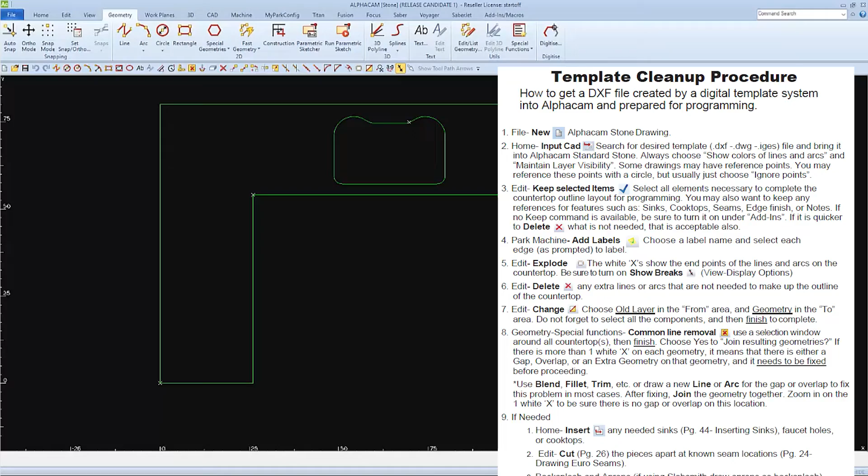You may or may not need to follow all the steps in the procedure. It depends on the method and completion of the digital template. We'll start off with step 1 of our procedure, which is to go to File tab and choose New. Then we can go to the Home tab and choose Input CAD.

When it opens, we can select what we would like it to bring in, text, if we want it joined, and so on. I'm just going to leave all of the selections checked. Then I can click OK and browse to the template that I want to clean up. Then you can either double click on it or highlight it and choose Open. If you get the message that points are found on a layer, always choose Ignore Points. You may have to do this multiple times.

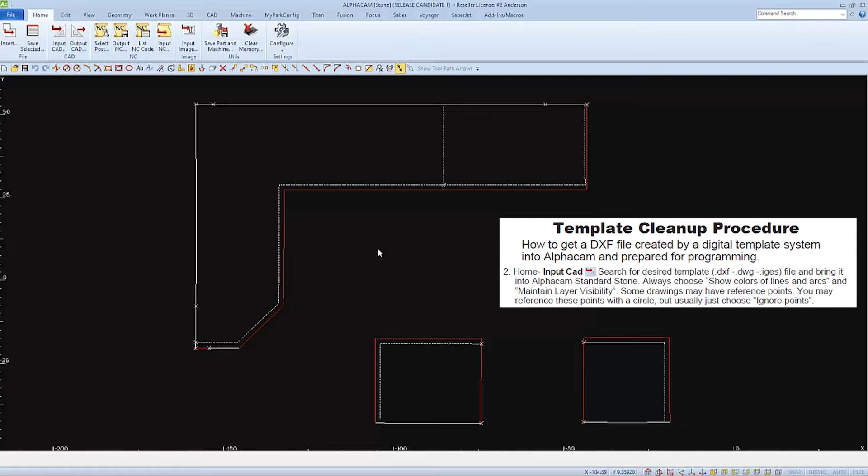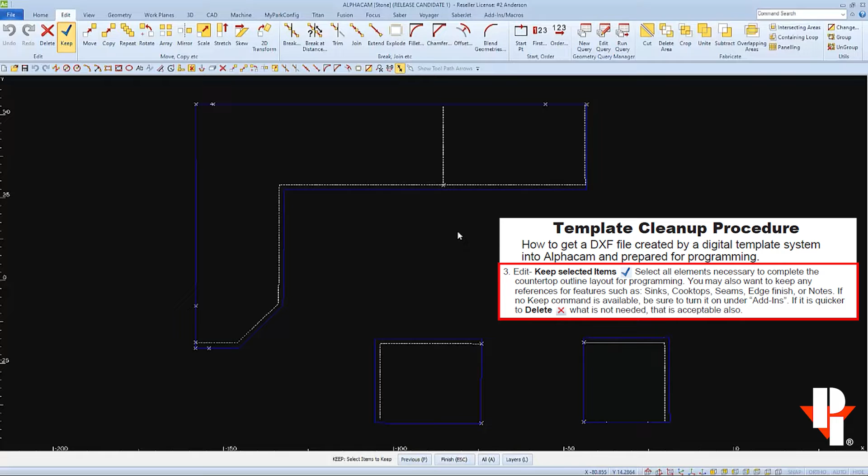Step number 3 is to keep the entire countertop perimeters and/or delete everything else except for the sink center line. The Keep command should be under the Edit tab. If not, you can turn it on under Add-ins. When you click on Keep, it says Select Objects that you would like to keep. Select the entire countertop's perimeters and also the center line of the sink. And then when you finish, it will ask if you want to keep the geometries and delete the rest, which you can click OK to complete.

Step 4 is to add labels if you wish. Labels are nice to identify edges if they need additional machining. You can find Add Labels under any of the Park Industries machine tabs. I'll start by using the Wall Scribe button. When I choose it, I'll be asked to select an edge to label, and then to click on a side that I want the label to be placed.

Notice how this side is broken up into 2 separate lines. If I click closer to the other end of the line, I can put another label there as well, whereas this edge is made up of 1 line, and the label will go right in the middle of it. These walls are the same, 1 line. And when I'm done with the walls, I'll right-click to finish so I can select another button from the Add Labels window. The only other edge that I have to label is the profiled edge.

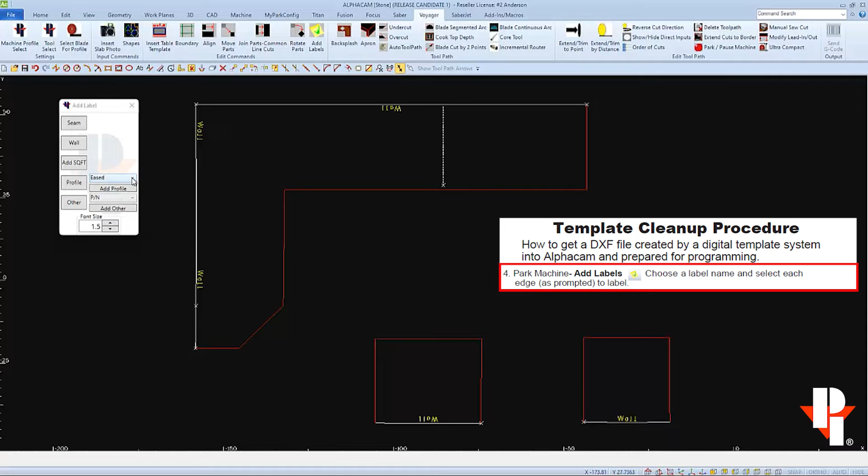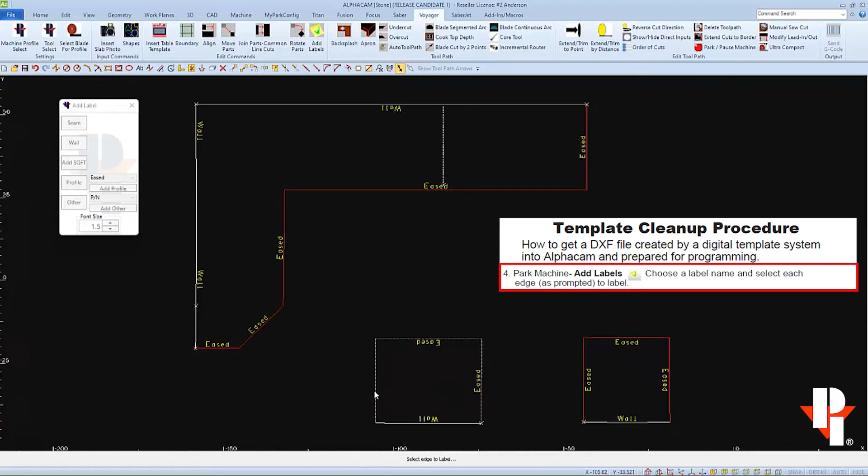I can choose the Add Profile button and type in a new name if I need, or if the name has already been added, I can select it from the drop-down window. So when I pick on the Profile button, that is the name that will be applied, which I'll do just like the Wall Scribes. Select an edge and then select the side. And when I'm finished, I'll right-click and then I can close out of the Add Labels window.

Step number 5 is to explode. I'll choose Explode and select everything. Text or labels will not be affected. Notice how this wall broke into line segments. This is why we could apply more than one label to an edge. Labels will center themselves in the middle of each line segment. The main reason for exploding is to see if there's any additional line segments that we might need to delete, which is step number 6.

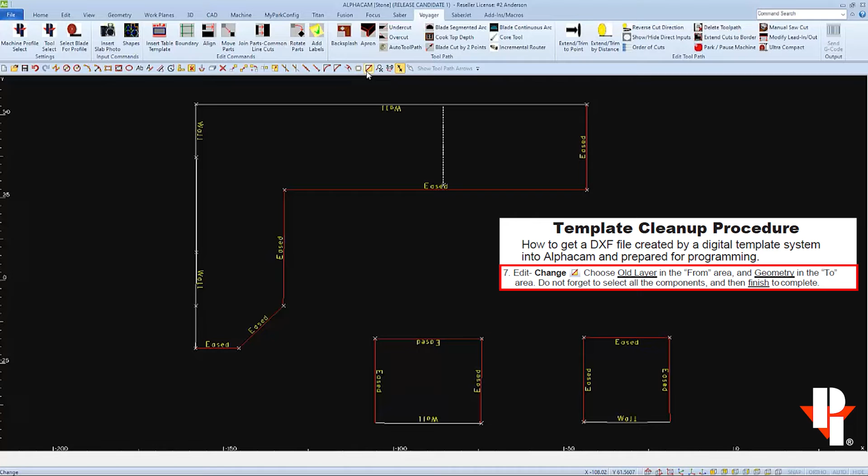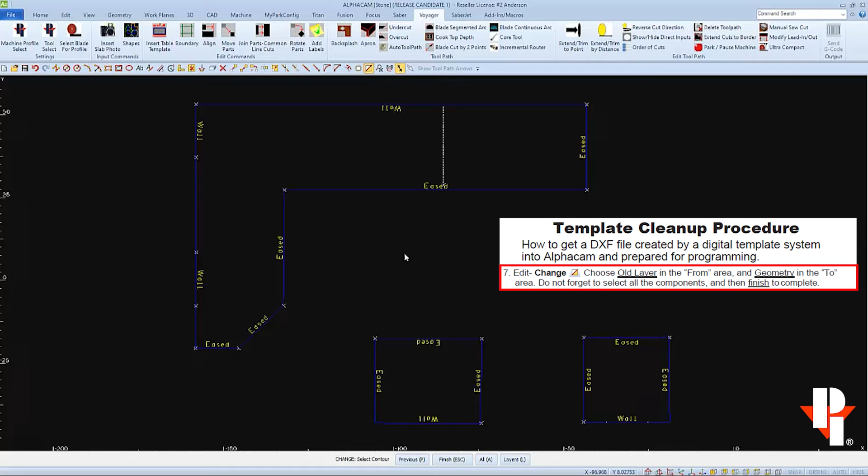And since there's nothing extra to delete in this drawing, I'll move on to step number 7, which is to change from old layer to layer geometry. I'll verify my settings and click OK, and I'll select all geometries because the text won't be affected, and I can click on the sink center line if I wish to remove it from the selection before I right-click to finish. Step number 8 is to use Common Line Removal.

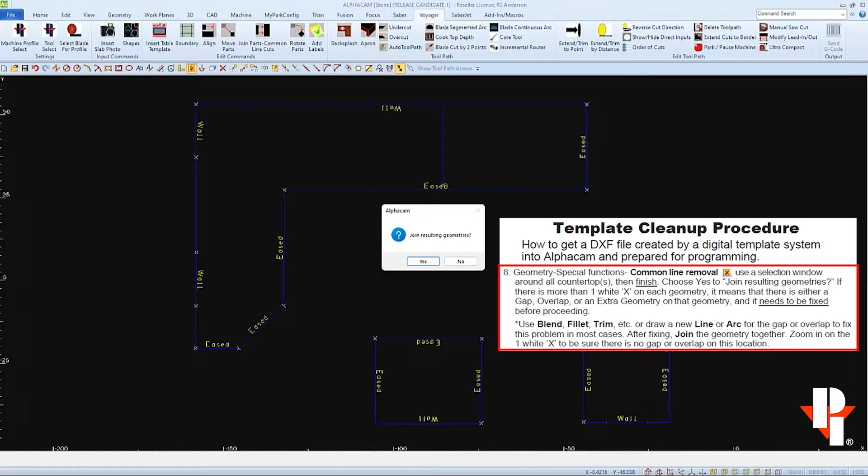I'll select it from the Park Industries quick toolbar. Common Line Removal will remove any lines on top of each other, and it also has a built-in Join feature, which I'll use. Select all geometry, right-click to finish, and say yes to join resulting geometries. When the edges of a countertop are properly joined, there should only be one white X on its perimeter. But that doesn't mean that it is properly joined.

To verify, I am going to place my arrow on the X and roll my scroll wheel to zoom in until the X goes away. At this point, if I don't see a gap or an overlap, the countertop has been joined successfully. And then I'll press Z on my keyboard to zoom to the extents of the screen. I'll repeat this procedure for each countertop, following the X with my arrow as I zoom in.

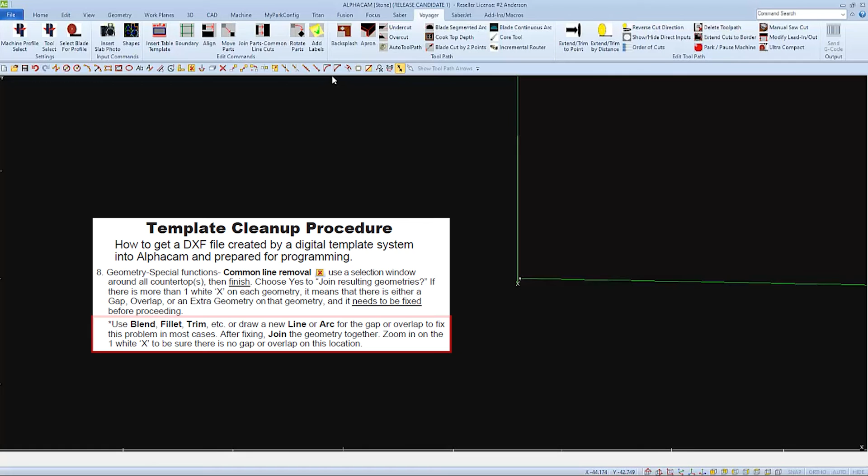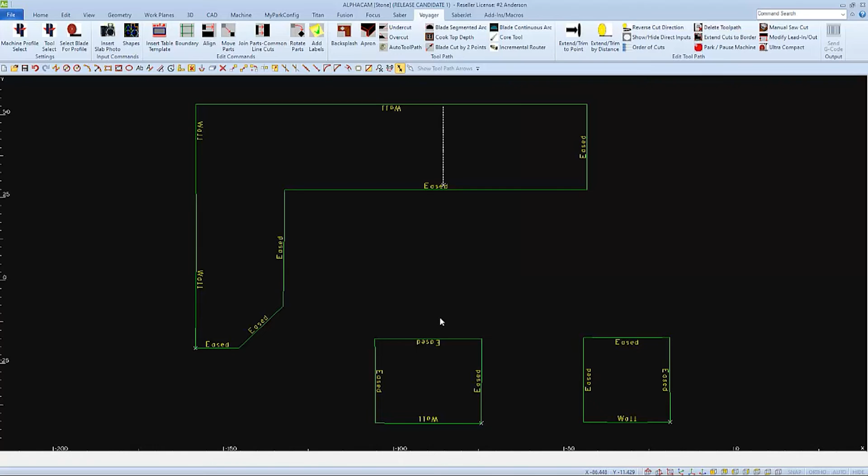On this last corner, I do see a gap, so I'll have to fix it using one of the methods stated at the bottom of step 8. In this case, I'll use fillet and set the radius to 0. Choose OK, and select the end of each line to close the corner. And now I am sure that this shape is closed. You may see the X jump to a different corner that was already verified. And then you can do step 9 if needed.

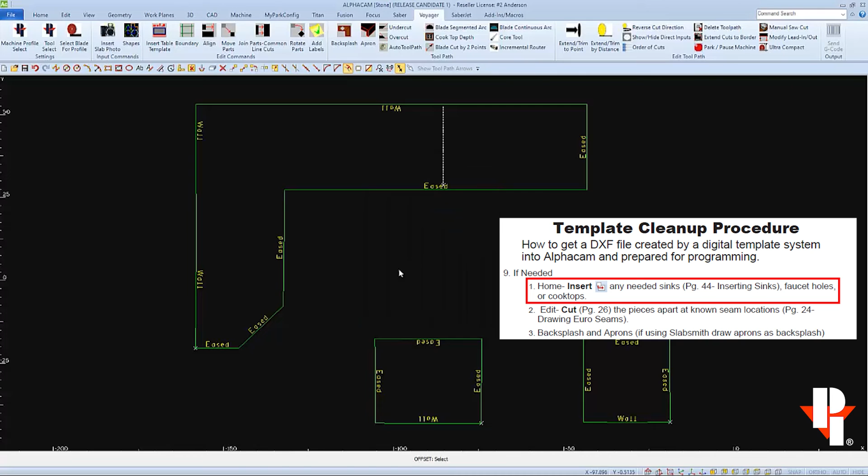I'm going to add in a sink. I'll start by making my setback line by offsetting the front edge. I'm going to use a distance of 3.5 inches. Then I'll say OK, click the front edge, and to the inside where I want the line. And now I have an intersection that I can insert the middle of the bottom edge of a sink onto.

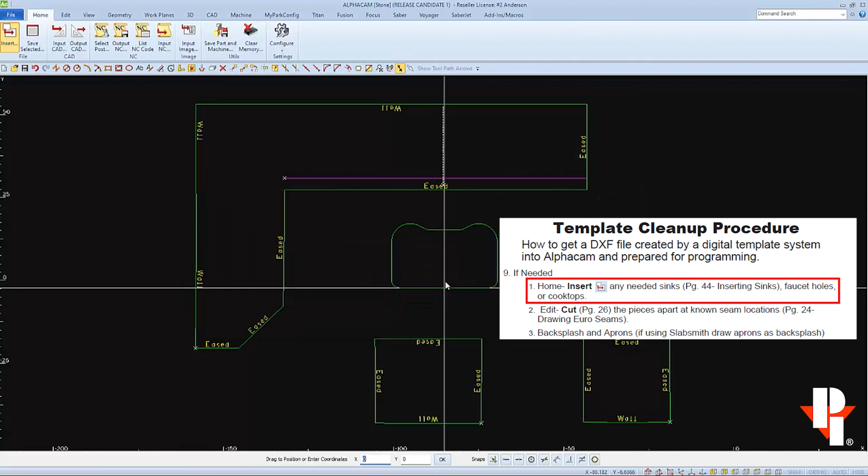I'll go to the Home tab and choose Insert. Then I'll browse and select the pre-cleaned up sink that I have. I'll choose Open, and then, since I want to set it at the intersection, I will choose the intersection snap, and then choose the first line and the second line. And now with the sink properly in place, I'll delete the reference lines.

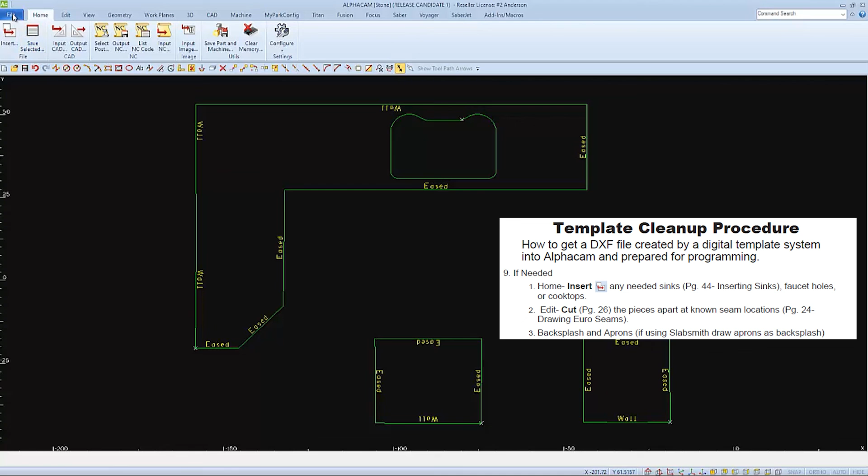And then I can also add in cooktops if I'd like, and draw in seams to separate my countertop into pieces. But I'm going to move on to step number 10 and go to File and save my drawing into a job folder to later apply tool paths and produce a program.